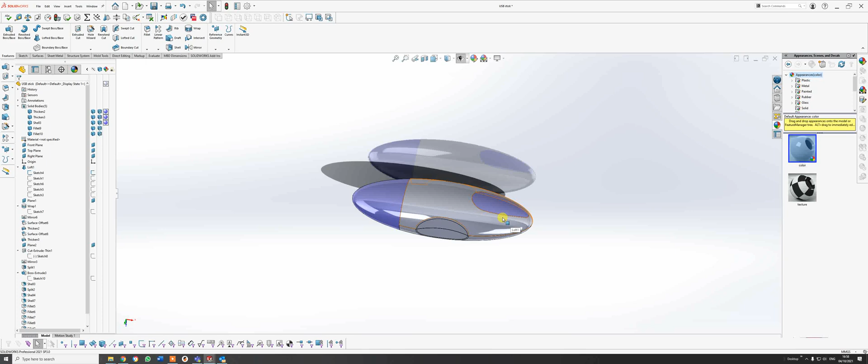Okay, this week I've got 2 exercises for you, and this is the first one. You may not get onto the second one, and we'll do that over the next couple of weeks. But what I've got here is a basic shell for a USB stick.

If I just hide the end cap on there, this is a master model. It is not an assembly, and I'll get you to do the assembly from that.

If I just switch all those back on, if you look at the design tree here, you can just see the sort of commands. I'm using a loft wrap tool to do this, and that's very good for putting text on as well. It used to be awful to try and do stuff, but with the wrap tool you can put some nice sort of embossed or debossed text.

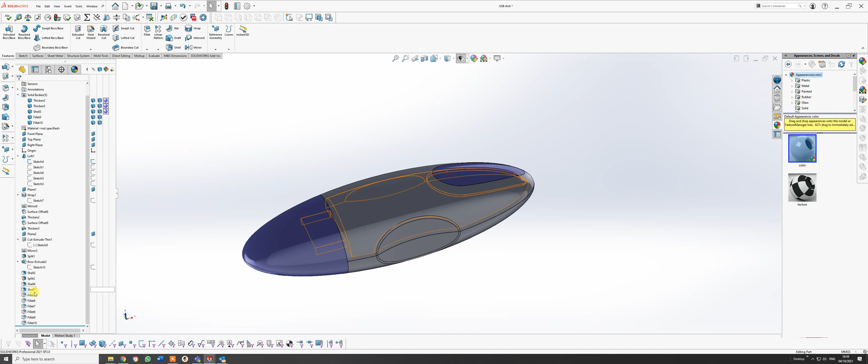You need to learn the difference between embossed and debossed - I'll leave you to look that up - and also use the sort of shelling command from it. As you can see, there's not a lot of stuff there, but it does take quite a bit of time. So let's try and crack on and see what we can do.

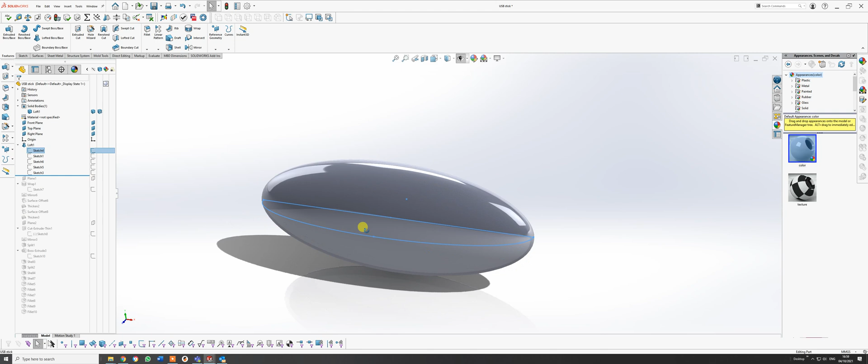I'll just take you up to the first part up here. So that is that there. If I go through the sketches, I have to use 5 sketches to actually make up that shape, and you'll see why as we go through. So that is what you're going to try and create, and this is how we do it.

So I'm going to go for a new part. And I'm going to make it easier for ourselves. I'm going to sketch, and I'm going to go into - let's go to front plane on that one - and I'm going to use the ellipse tool, which is there.

Now there are several ellipse tools you can use, but just use the basic ellipse tool to start with. I'm going to go there to the outside and up there. Okay, just click on there, click on the center.

This is holding the shift key down. Okay, and just make sure they're all horizontal, and just put a smart dimension between there and there of 50 - no, it's nearly 50. And then a dimension from there to there, and I haven't done the horizontal on that yet, and let's just make that 12.

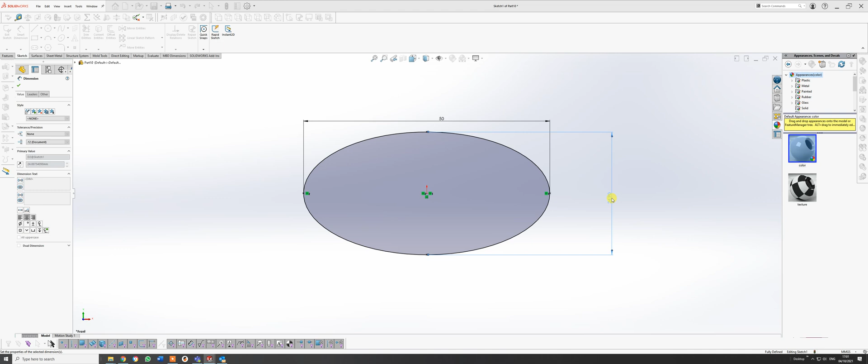So on this, that's the sort of flat lozenge that we've got here. I'm also going to draw a line from here to here, because I only need half of it, and then just trim away the bottom half. Okay, and that should stick, and then give that a green tick - I say green tick, but it's a blue thing.

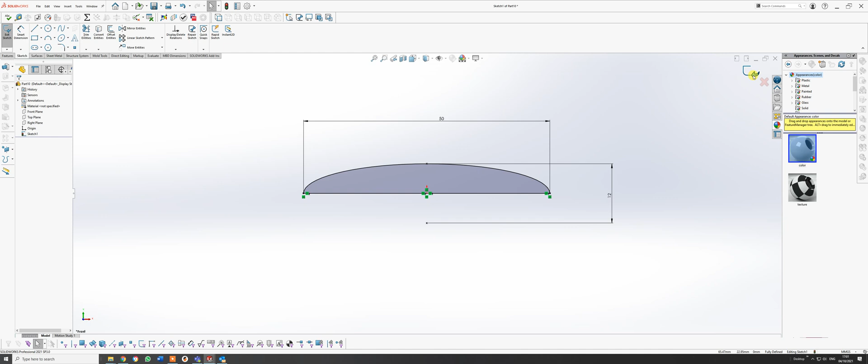Okay, I'm going to bring up my - sorry, on there, my things. I want to now sketch in this one here. So again, I'm going to sketch, and I don't want that plane. I actually want a different plane this way, so just come out of that again.

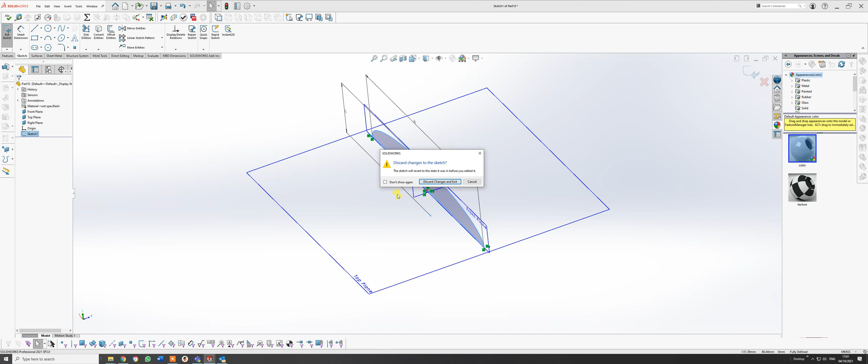Sometimes it does that, so it just tries to remember. So I'm going to sketch, I'm going to do it in that plane this time, top plane, and I'm going to do exactly the same again with the ellipse tool from that center out to that point there, and this time the width is going to be a little bit different.

Let's just check we do have it. It should do it, because we've got those 2 points there. It should be fine. Let's just make those - I'm going to get this wrong, I know. Make this horizontal - no, it's going to be vertical. So let's just clear selection.

We don't need to do that at all, because as I said previous, so let's just take those off, just delete, select and delete those. Okay, what I need here is a dimension from there to there, and as I said, that should be 20.

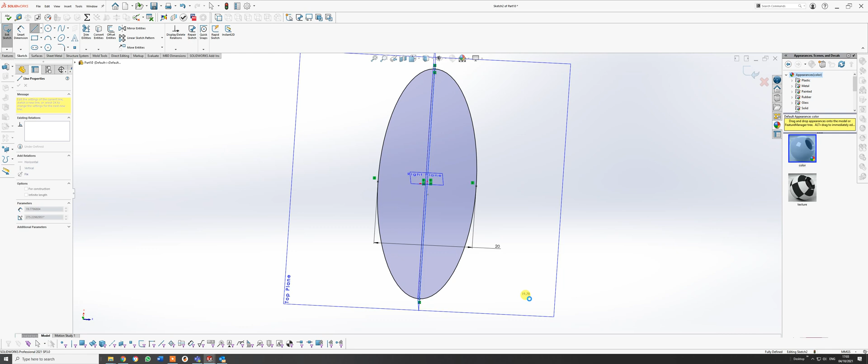Okay, and then again, draw yourself another line. You have to do this with a loft, and surfaces won't really hack this - you probably can do that in Rhino. Okay, and that's a line there, and then go to my trim tool, and there we go, I've got that one there.

So I'm just going to do this twice more, and it's exactly the same as the top one I'm going to do this time. So I'm going to go to sketch - it's done it again. I actually want to go into that one there, exit sketch, let's try again. Sketch into that plane there, and I want to do the underside of this now.

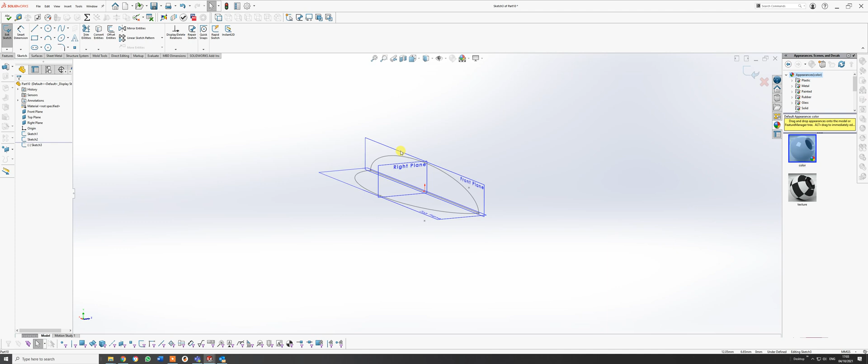Back to the ellipse tool. It should be a lot easier now you've done it a few times. Let's go into that one there, out to there, and down to about there.

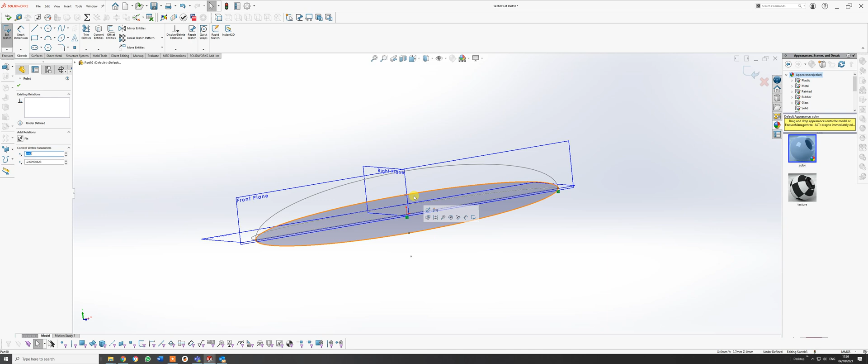What I could have done there is actually move that down to that point, and it goes black, draw. I'm picking up on the previous sketch, and then I just want to draw a line between there and that, then trim away those entities.

Okay, I trimmed away the wrong ones. Just Control Z. I want to trim away the top, so I've got the underneath. That's perfect. Control Z is your best friend.

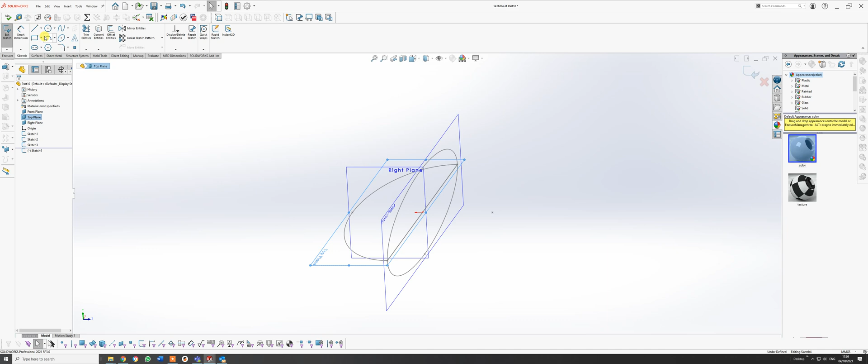And then last but not least, I will do this one here. Let's click on that plane and then go to sketch. Brilliant. Again, go to the ellipse tool and center mark out to there. Just pick up on that one there, so I know it's exactly the same size, and then draw a line in.

For some reason it's not, it's all blue. Let's just try it again. There we go, it's picked up on it this time. Draw a line from there to there, and there we go, and then trim.

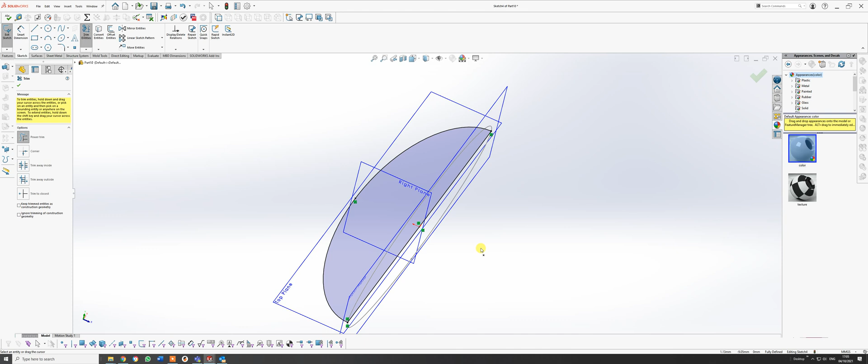There we go, wrong side again. Control Z, as I say, be your best friend, and then trim on that side there. And we should have now our 4 sketches, but we need a 5th one.

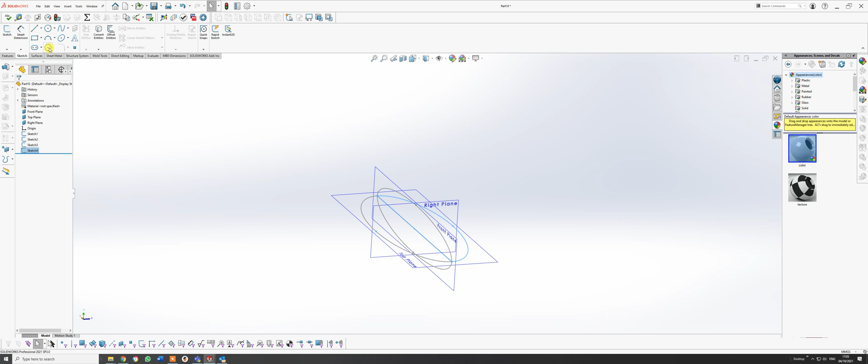Now the 5th one, I want to do right bang on that right plane, but to these points here. So again, ellipse tool. Let's just click on that plane first, and then put an ellipse in there, from there, pick up on that point there, and that top point there. Okay, so that's all done there.

But as you see, we are not. Let's pull that way. That one, yeah. Sometimes it's just a little bit of persuasion to do it.

Now what I'm going to do is just come out of there, and switch off those because they get in the way. So you can roughly see I've sort of created this cage for this loft to do. There are 2 ways of doing loft: boundary boss base is one, and loft. You can use them the same, but it's easier to use the one I'm using for now.

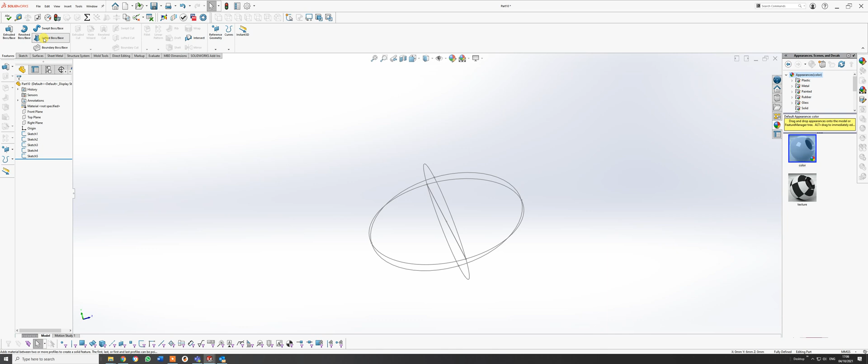But do experiment. So I'm going to click on that one, and click on next one. I'm doing these in sequence, and I'll click the next one. You notice it's sort of deformed in a way, and it doesn't match. You can see why I've got this guideline there.

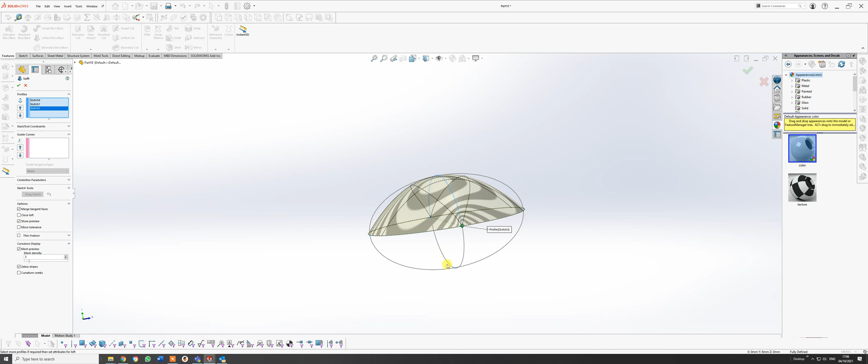Now I've selected 4 sketches, and what you'll see is when I click this line, it doesn't actually complete - I get like a slice out of it. Nice command here called close loft. Perfect, and give that a green tick.

And I'm just going to pause there because I need a drink.

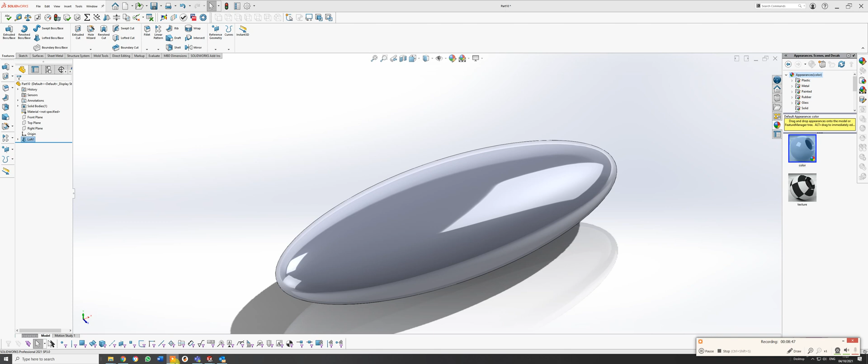Okay, so that's probably the easiest bit done. And you might hear a lot of barking at the moment. Dog's got to be fed.

So the next stage really is to put this feature in here. So I'm going to switch my planes back on. Or you can go into, as I said last week, there's that little arrow up here - I'll just pull out that there, and here you can switch these on or off, depending on what you want to do. Or if you just press the eye itself, it takes them all off.

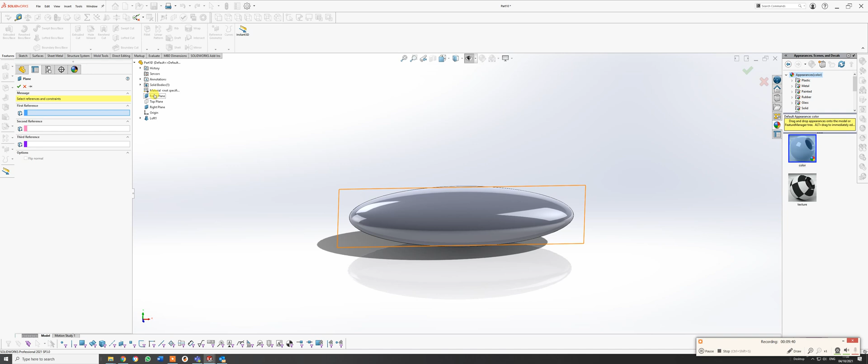Okay, so which plane do I want? I don't want that one at the minute. I want that one because I'm going to put another plane in. So I've got reference geometry, going to go to plane, and I'm going to use the top plane there, and I only really want that 10mm off the top.

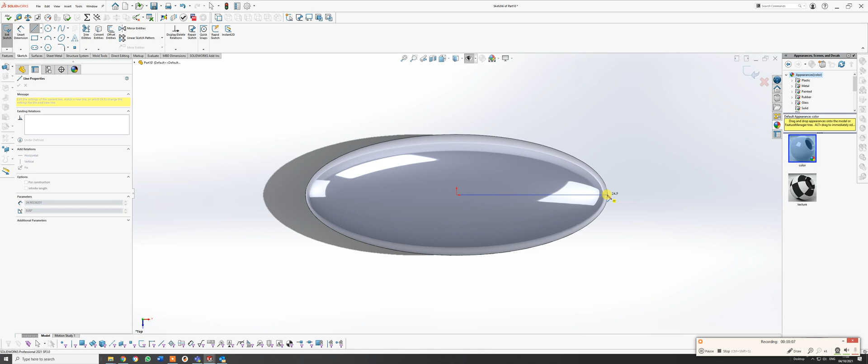Okay, and I'm going to do this little feature here. So press space bar on the top there, and I'm going to go to sketch, and draw a line just from that centre mark there to roughly where that endpoint is there. It doesn't have to be on that endpoint, but it does help. So I'm just going to do that to see if I can pick up on it.

Yeah, no, it's not. So I'm just going to go off there for now, and I'm just going to convert that to a construction line.

I'm going to draw two circles on that line, one about there and one about there. I'm also going to try and do a construction line from about there up to there, just random. Okay, it's still blue, and I'm going to do a measurement from there to there.

We know this thing's 50 long, so I'm going to have that at 25, just to give me that reference of where I want stuff to be. And there we go, smack on.

I'm going to give a dimension to that, and I think I had that at 8 mil. 8 mil. Okay, change, and let's do it 4 mil. I did have it 3. Let's do 4, I quite like round numbers on that one, and I'm going to have these at 10.5 apart.

So one there, so these at 10.5. This is for your thumb, you'll see what I mean. 10.5 apart.

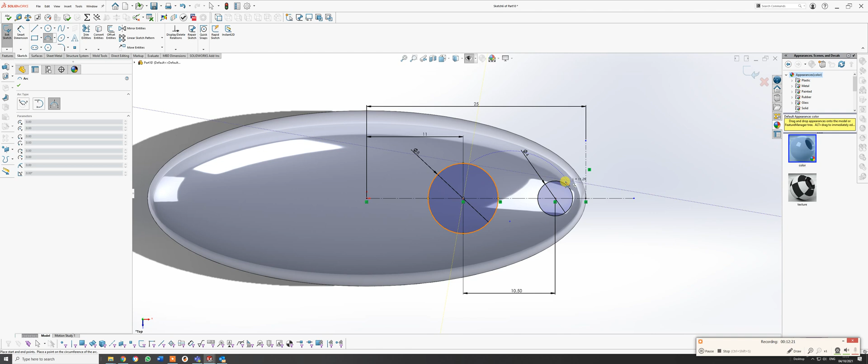Me and my arcs, eh? Let's try once more. It's about there, about that there.

Okay, and let's just do our tangential relationships here. It's always good to have relations rather than dimensions, but a mixture of the two can help.

And let's give that a dimension. That's 16, so we give that 15. What does that look like? 15.

Let's make it slightly smaller, let's go 12 on that one. Here we go, is it going to do it? No, because I didn't click it. Let's try again. 12.

Okay, I need to go the other way, so let's go 18. That looks better. Okay, and just to make sure it's right, I could draw another thing, but I'm just going

to mirror entities. So I want to mirror that and the mirror about that centre line. Okay. Oh, I needed to copy that. Control Z.

Let's try once more, I was moved, that's why I did that. Beg your pardon. Mirror entities. I need a copy, I need to mirror about. So that's that.

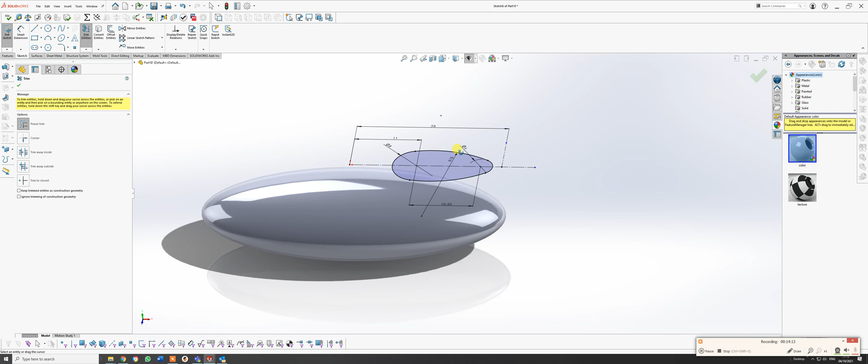Okay, so now you can see I've got that hovering above that area. So now, I don't know if you've done this before, but there is a feature command come out of the sketch called wrap. Now if I click on the wrap, you've got options here.

So you can see it, if it highlights, you've got emboss, which means it comes out. I'm sorry about that, dog loves to bark.

You've got deboss, which means it sinks it in, and then you've got just to scribe, so it just scribes a line on there, which is quite good for demarcation.

And you do exactly the same here with text, which I can show you later on, or I'll show you in session.

So if it was a cylinder, you'd use that, but because it's like a foldable surface, I'm going to use the sort of wrinkled sheet approach.

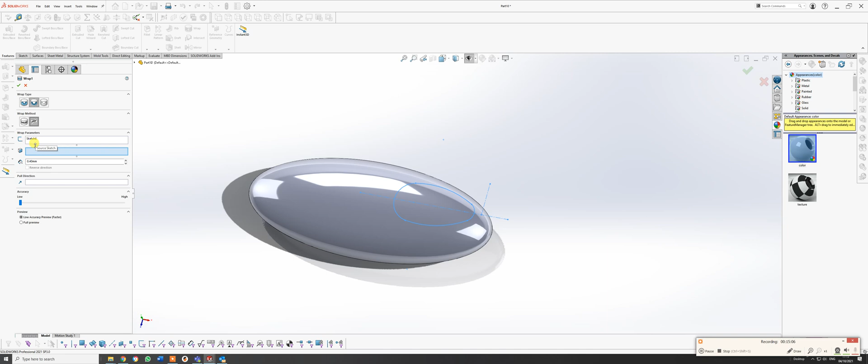It's already selected my previous sketch because it knows what I'm going to do, but it also wants me to choose the face I want it on. So I've chosen that, and automatically you see it's actually highlighted where it's going to be.

Now, as I say, I want to deboss that, and I want to do that at 0.4 because there's going to be a little rubber insert in there. So if I wanted to do accuracy more, I could do that.

There's also pull direction, but it's fairly obvious on that. Pull direction is where you select something going up and down on a flat surface or an edge of something, just so that it actually knows what you can do.

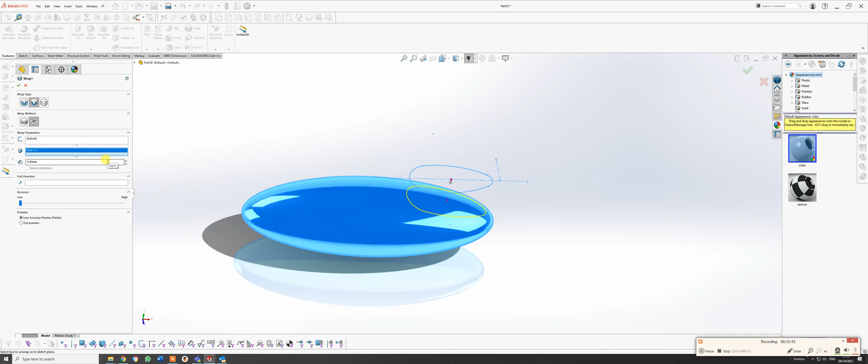The other way you could do this is extrude cut surface, but you wouldn't get it. You would have to do a plane that was tangential to that surface, which is hellishly difficult to try and achieve.

So I'm just going to give that a green tick. 0.4 I'm going to do, and you'll see what happens. So therefore I actually have that cut out now.

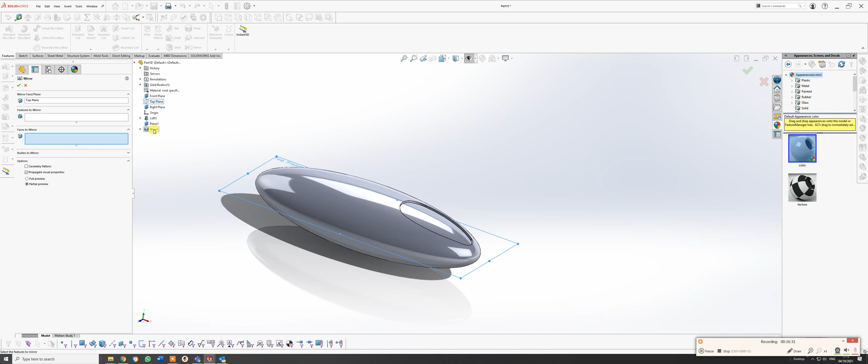Now I want that on the underside as well, so the easiest way for me to do that is go to mirror, the mirror face plane. I'm going to pick the plane that cuts through all of this. It's faces or bodies to mirror. I could click my previous one, it doesn't like it, or go faces to mirror, doesn't like it either. So I'm just going to click on there, and it's done it automatically.

Hopefully, having done that, we will go through. It's thinking about it. Come on. And it doesn't like it. Oh, terrific, isn't it? Sometimes, if a geometric pattern, let's try that.

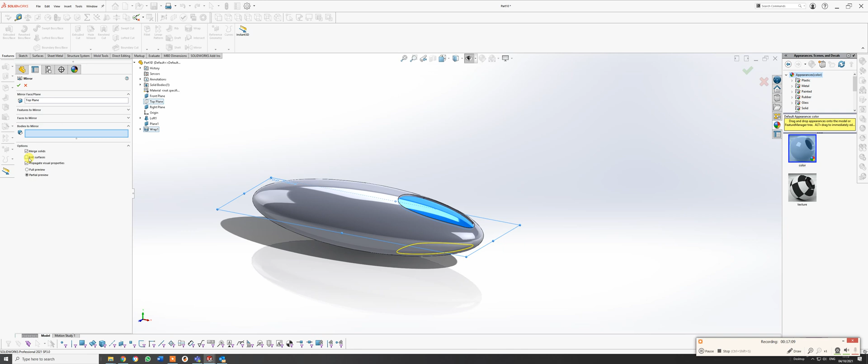Pattern faces failed to form a closed body. Sometimes I do actually give up with SolidWorks, but it's interesting. Let's just try this, if it would do it that way. So let's try bodies to mirror, and it still doesn't do it because it wants to merge. So if I merge, let's see if it would take the merge solids off. Has it done it? No, it hasn't done it.

It did it on my previous one, but let's just delete this for now. I mean, you could split it and do it another way. Let me just try one more time. I'm quite glad this is happening because it shows you that it's not just you that this happens to.

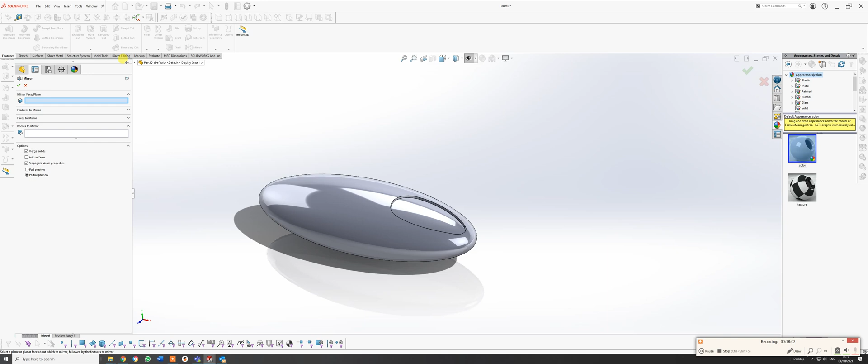So let's go to mirror, and what do I want to mirror? Okay, face plane thingy bob, I'm going to click on that. Sorry, plane, I need to read what I'm doing. There's a plane, it's not that plane, so it is that plane there. And bodies to mirror is that, and it's chosen that one there.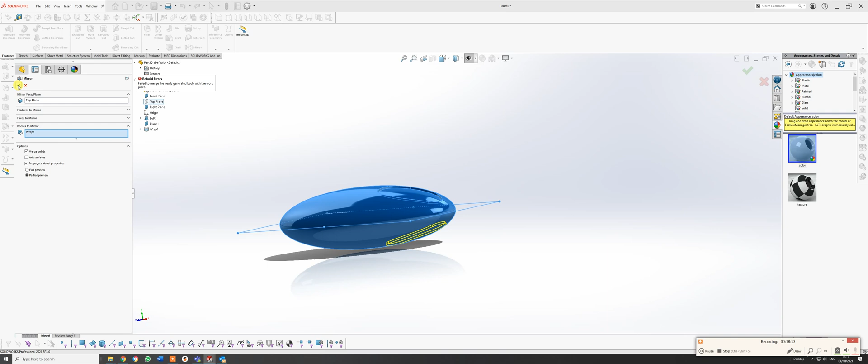So let's just delete that, go on to that one there, and let's just try again. Failed to merge again on that. Okay, I'm going to leave that for now. We'll try it in class, but we'll see what happens.

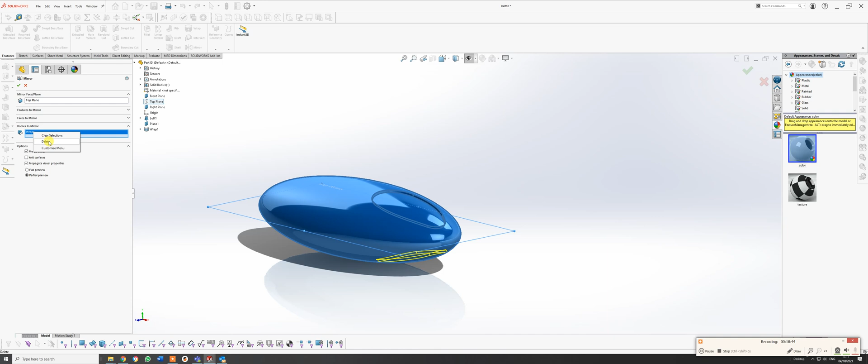It's funny, if it shows you a preview, it should do it, but it just kicks out. Let me just try delete that. It should actually pick up on that. No. Okay, we can always come back and do that later on.

I'll just show you if I go to the previous one. If we go to where the wrap is here, I've got mirror 6, you can see that it's done it there. And if I go to edit mirror, it would probably fail it. You can see from that, that's how it should work. But we'll just leave it for now.

There are several ways to do this. Okay, go back to the original drawing. So what I want to do now is actually create the part that goes in there. And again, this can be quite controversial.

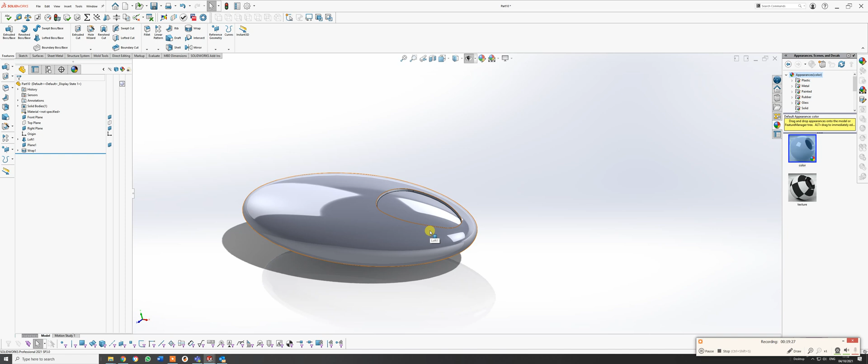So I'm going to touch on surfaces, and again, sometimes it works, sometimes it doesn't. If I go to surfaces, there's a command on here that says offset surface. So I'm going to click on offset surface, and click just on that face. You can see there, it's got a default of 10. I'm actually going to do that at 0.

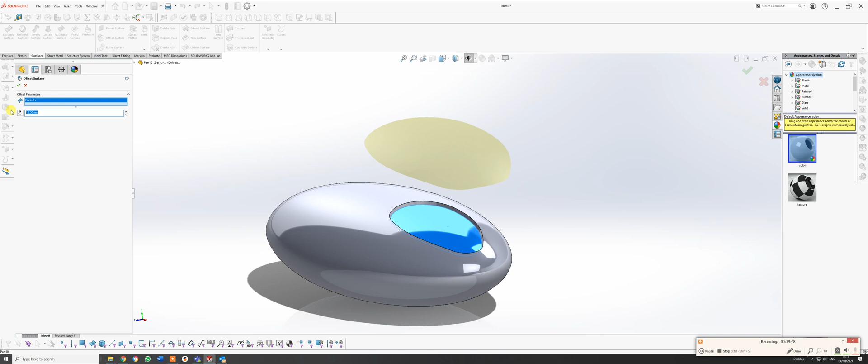Okay, and give that a green tick. You'll see why in a second. Now you'll see I've also got a surface bodies folder here as well now. I'm just going to expand that and switch off that, and you can see that I've got a surface on there.

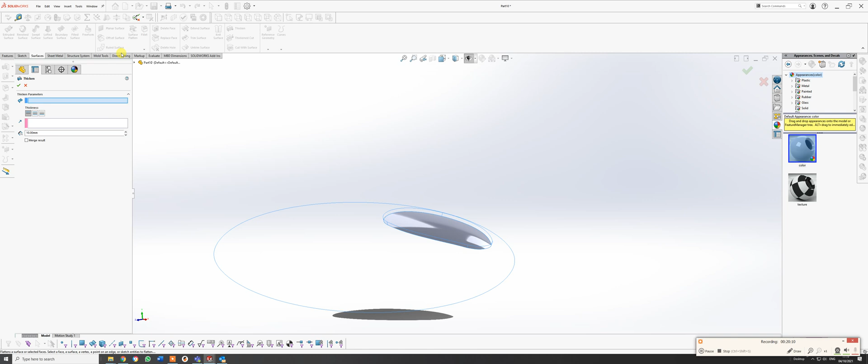What I can do now is actually thicken that surface. I'm going to click on that surface, and I don't want that, I want 0.4. Okay, and it actually creates a solid by doing this. I don't want to merge. If I do that, there's that part there, and if I click back on, I now have my little insert.

And if I was really particular about this, I can go to appearance and just come down to face. It should give me a colour chart, and I can just give it a colour. Let's give it red this time. So you can see that that actually is a separate entity to what I wanted to do. Now, that's that bit done. It's a shame underneath, I suppose it's quite nice.

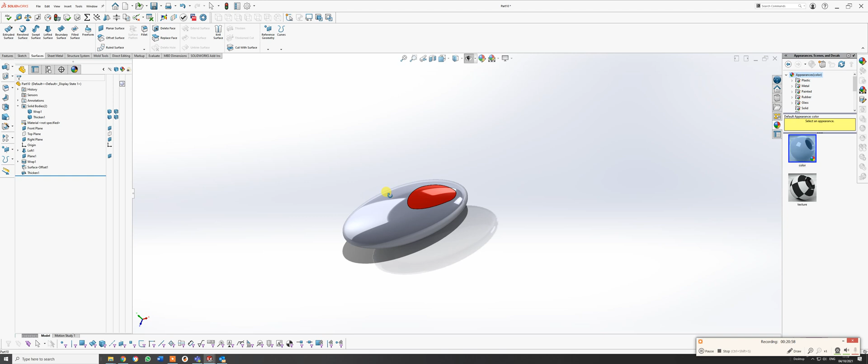What I want to do now is to create the two side cutouts. So I'm going to go to sketch again, and sketch on that top plane, and I'm just going to do a rough curve from about there to there.

Okay, and I need to give that some dimension. Best way to do it.

Oh, and there he goes again. He's like a burglar alarm, my dog.

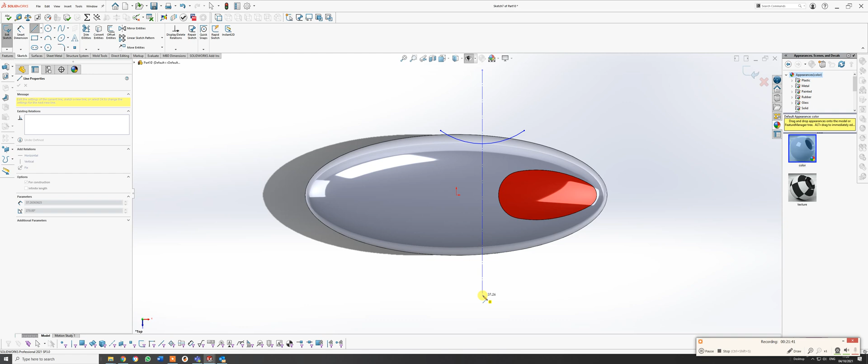Right, what I'm going to do is just do a centre line from up there to somewhere down here, and I am going to smart dimension from there to there. Okay, let's just do that at 4 mil. And if I give that a radius of 12.

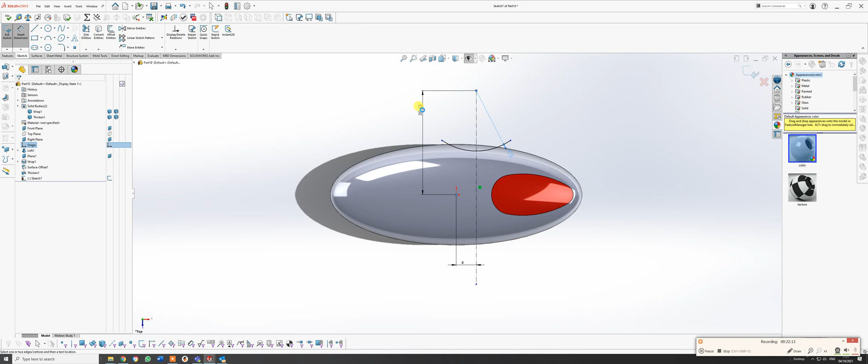Okay, and what else do I need to do? I need a distance from there to that endpoint. It should go black. Excellent.

That's 20. Let's just change that to 20. Oh, 20.5, 20.5. And these are the little finger holes on here. So let's just go to features and go to extrude boss base.

Okay, thin feature, I want it the opposite way. That's fantastic. No, actually, I want to extrude cut. So I just go extrude cut.

And again, I want thin feature, and I want to reverse that. And give that a green, make sure it's through all. One direction, just come round.

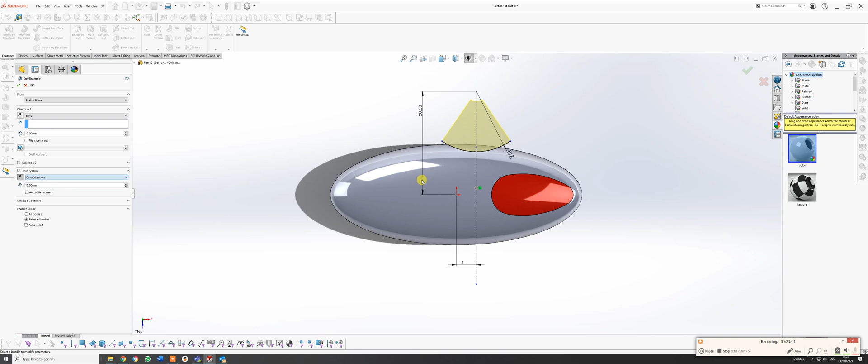I'll just pump it up. So it's this one here. Through all. That's it. Give that green tick. Okay, so it's taken that chunk out.

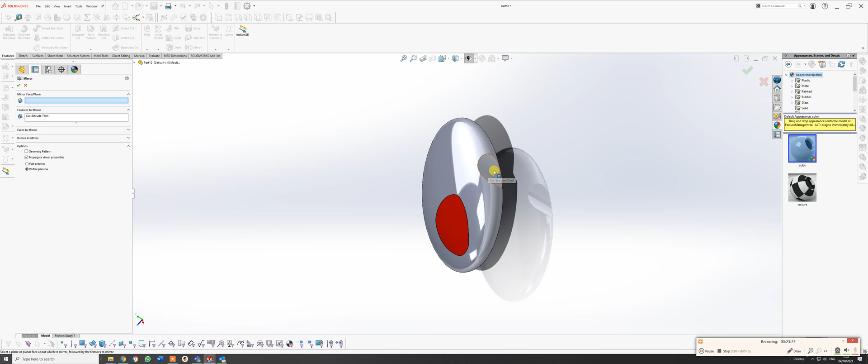I can then go to mirror entities again. Now, if I was doing this properly, I'd have draft on this. But my mirror face, let me just have a quick look where my mirror face is. Which one? That one there.

Okay, so that's two sides done. Fantastic. Okay, I'm going to stop there because I need to get another drink. But you can see the basics of your bit here, and we need to do this end cap bit. So I'm going to pause.

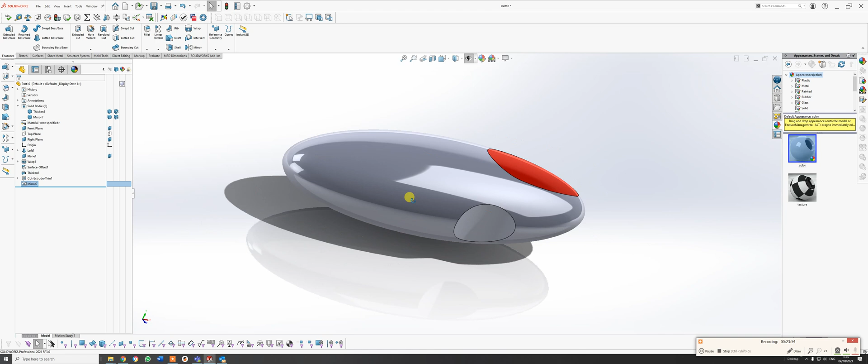Okay, what I need to do now is split this. You might get barking again in a second, poor dog.

So I'm going to do this using planes. So I'm going to switch my planes back on so I can visually see these.

Oh no, I want to do a plane off here. So if we go to reference geometry, go to plane, and the boy has dropped his ball. Let's just reverse this offset. It's a flip offset.

And let's do that by, let's go 6. That's probably maybe 7 millimeters. Just 1 second. Yep, so let's have that at, I went the wrong way there, didn't I? 7. Let's go down to.

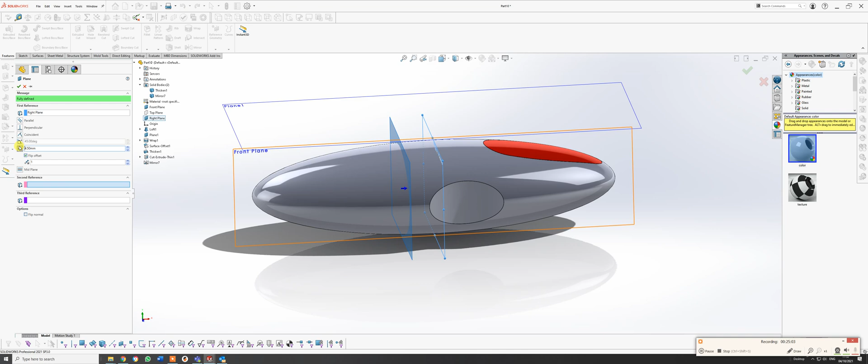So that's a plane in. I'm going to use that plane to actually split the part on there. So if you go to Insert and come down to Features, and at the bottom there's a thing called Split, and you get this default template.

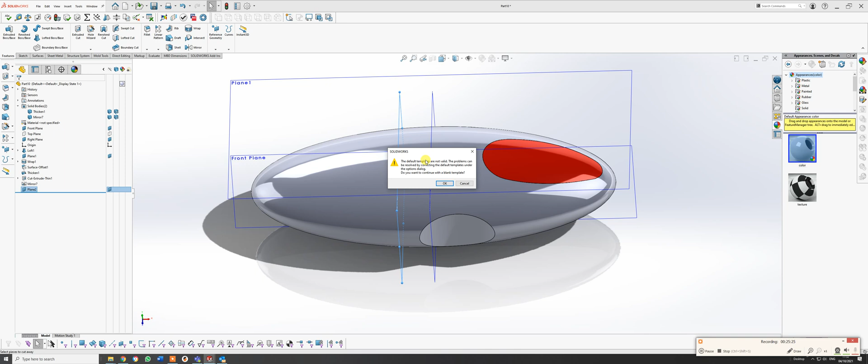Don't worry about it, just say OK, and then you get this dialog box up, and it's already chosen that plane for me because it knows what I'm doing. So I'm going to click on that there.

Sorry, it didn't select. Delete that one. Go into that box there. Okay, selected that body already, and it says cut body, and it gives me 2 parts. So that's the sort of preview for it, front and back.

So I'm going to assign automatically. Okay, let's do that one and that one. Assign automatically. Part has been.

Please save the part before. Okay. See, it tells you everything that you need to do. So let's just go to File, Save.

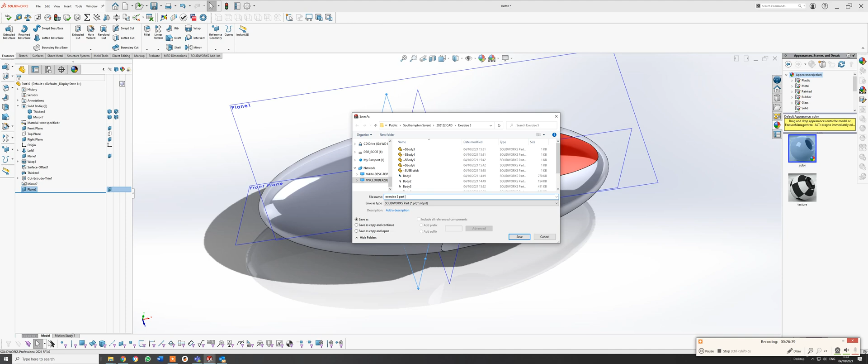I'll do Save As, and let's just do that as exercise 5, part 2. You can save it as whatever you want to do it.

Right, let's go back into Insert, Split. I'm going to do 2 splits, but I'm going to do this one first because it allows me to do other bits and pieces. So Features, and then come down to Split. So I already got that there.

Select the body, that one there. Cut bodies, just gives me 2 options. Just double check that one and that one. And I'm going to do assign, auto assign names, which you should have done anyway. And just cut.

Has it done it? Yes. So give that a green tick. Okay, and it's just opening up 2 separate part bodies.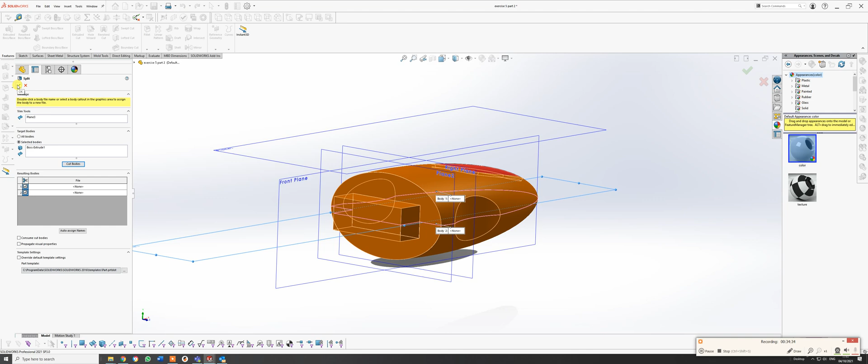Okay, I'm going to go to insert features, then split. I'll use that plane I just put in, and select the body - that one, not the shell, the last one. Let's delete that and cut bodies, that one and the one underneath. I don't want bodies consumed, I want them left separate. So I've now split that body.

If I just hide one of them - let's do that one, switch on. If I hide that top one, and hide that as well for now, I can then just switch off everything else and go to shell.

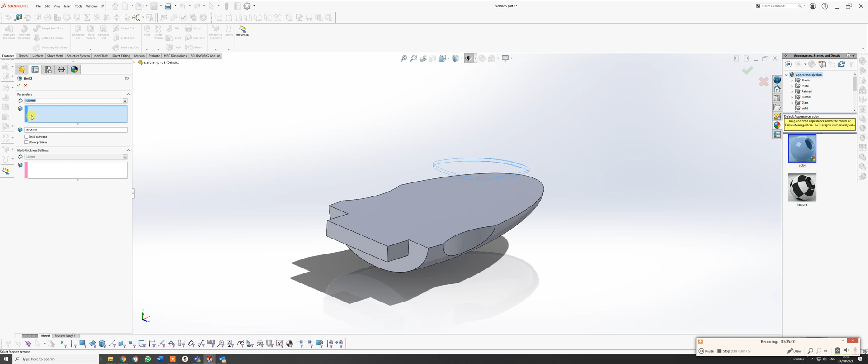Just one mil, and I'm going to select that top face, that side face - don't worry about that. It should come out. You can see I've got a nice shelled unit there, and I can put fillets in.

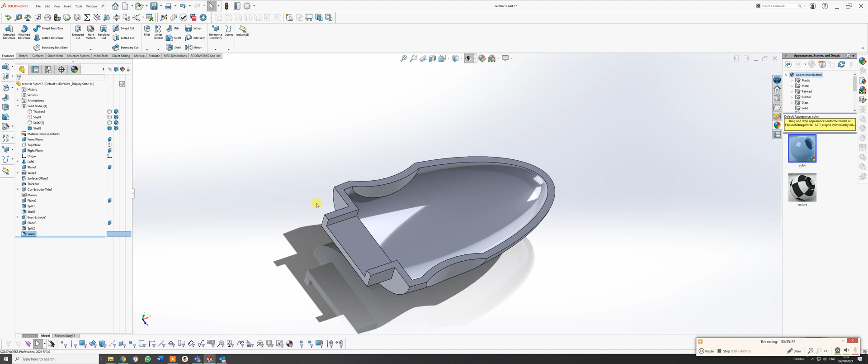I'll show you that because there should be fillets around here. If I just bring the other bit, switch that one off, bring that one off, and do exactly the same thing, and go to shell - that face and that face. You can see you've got your part there, and it's done that quite nicely.

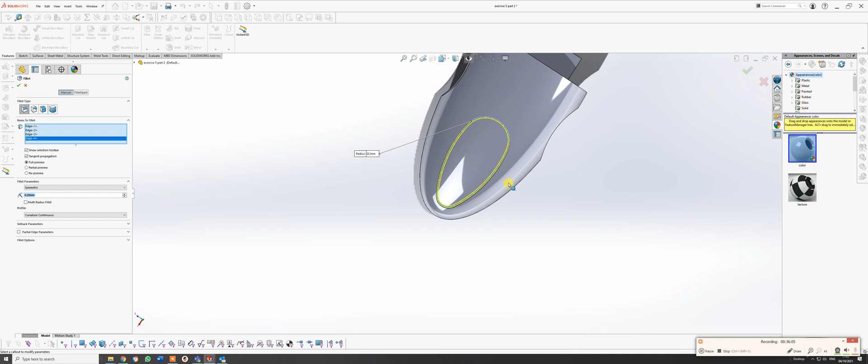Now for fillets, I've got to fillet, and I'll say something like 0.2. I can do the inside of this here, just go around. The reason being, it's just far better housekeeping when you're doing stuff. And I can probably do the outside of that there, although that probably should be a different one.

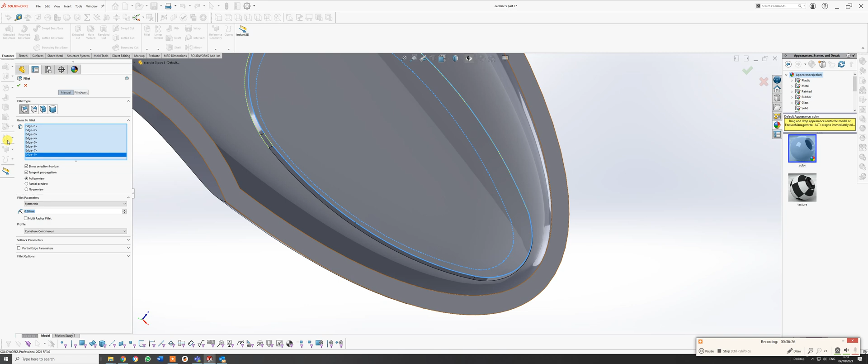Doesn't like it - see, it's probably because I picked up a face as well. No, doesn't like that at all. That's probably because of shelling, so it's probably there. So let's just go to 0.1. There we go, that's better.

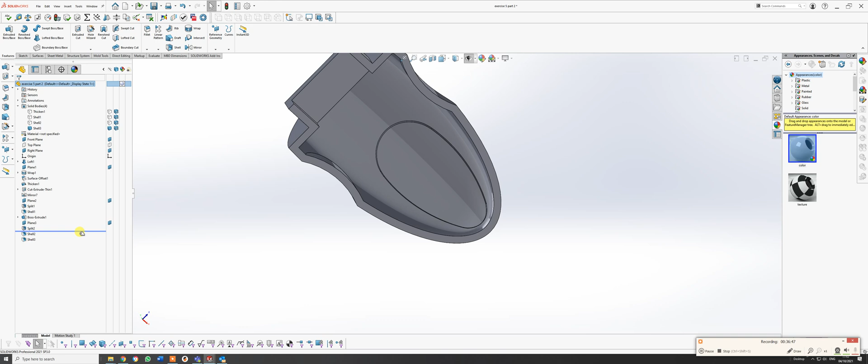Or you could theoretically fillet that way. So let me just delete that last one. And let's just see if I go up above that shell there, and fillet this here with a 0.2. Let's do 0.4. Let's do 0.3. No, 0.2.

As I say, fillets are the bane of - you can do all this fantastic work and then come to do a fillet and spend more time doing fillets than you do the whole drawing. So let's just see if I move that back in history, has that actually done what I asked for? Just thinking about it. This does take time.

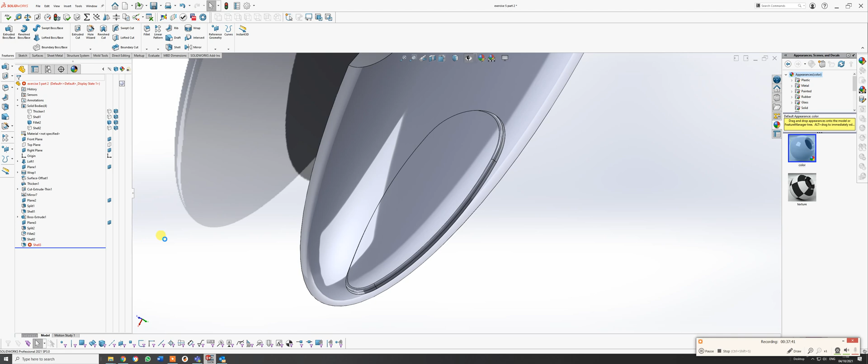Come on, the last one it doesn't like doing, the last shell. So you can see why fillets are notoriously difficult. Let's just change that, if I do it to 0.1. We were talking just breaking the edge really, see if that helps. It may not do it.

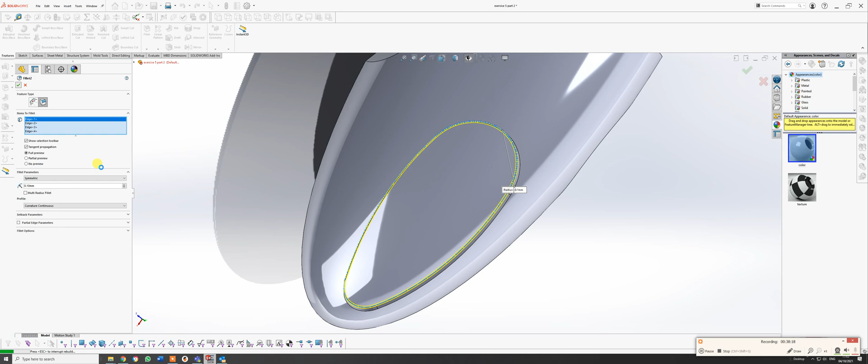Let's see if I do that at 0.1, it should come out at 0.1 mil bigger, 1.2 on the other side. Let's just see what happens. Come on. No, it still doesn't like it. So I'm just going to delete that fillet for now, and see what happens. Yeah, it loves it.

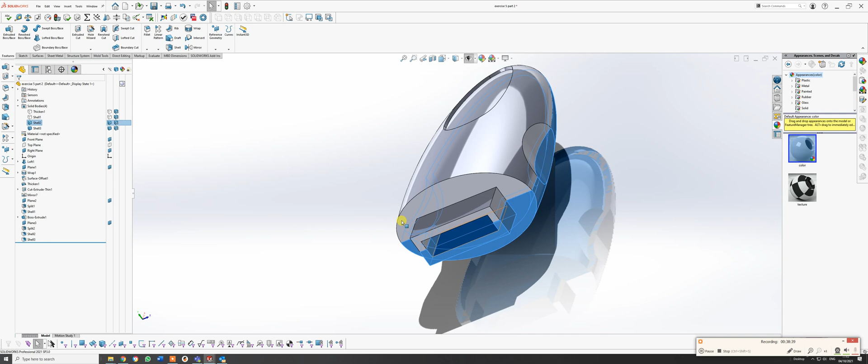So you can fillet those individually on the outside. If I just bring the other bits back in, you can see you've got that part there, that part, and that part. And if I just copy that surface, copy appearance...

...and just paste appearance to the body. Okay, you've got your part there, and if I go on to the section tool, you can see how it slots together. Now it's just very, very simple stuff.

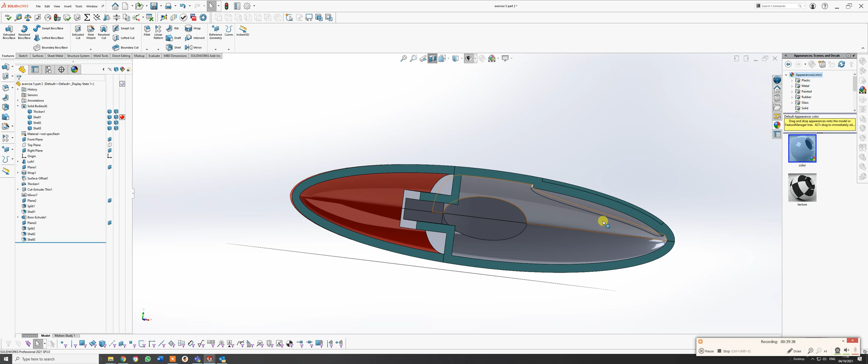What I would like you to do is try and do your own, and if you feel confident enough, get an old USB stick and just copy the bits and pieces on the inside and fit it in there, then go back and adjust. So you've actually got a USB stick holder that you could theoretically print out and use being your own, and also try to copy that bit over.

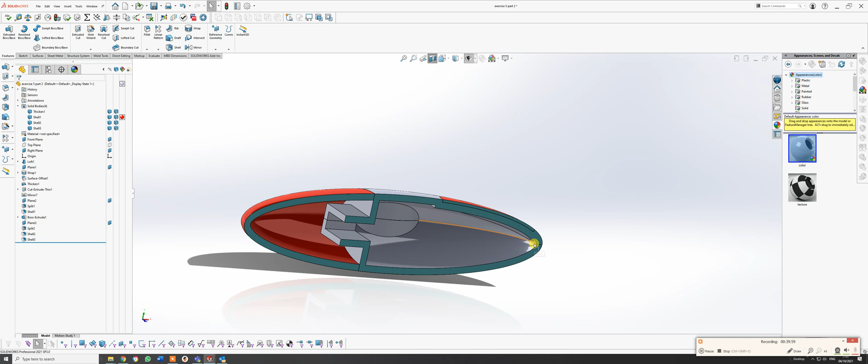Let's try that now actually. Let's just see if it would do it. Let's just, no, let's leave it till the session from that one. You would also here actually have a kind of lip for the two to lock in together, but it's just a nice little exercise to do.